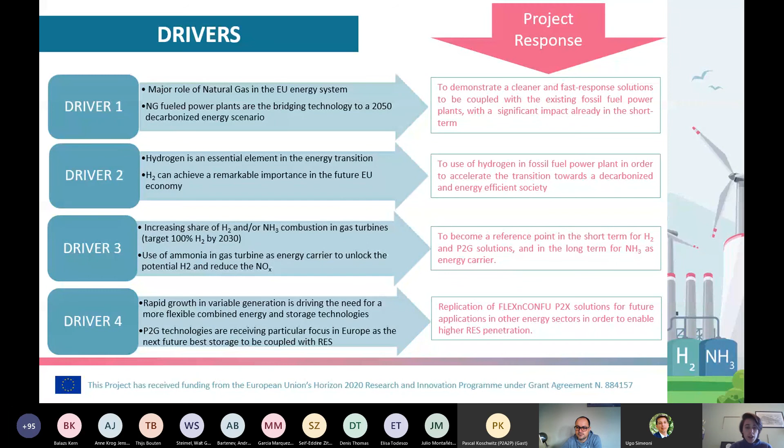Which is the goal, the aim of FLEXnCONFU? The aim is to demonstrate at TRL 7, which means that a prototype will be really integrated in a real operative plant, which is the power plant managed by EDP in Portugal, the Ribatejo power plant. So what we would like to demonstrate is an integration of a power to X to power solution that is able to increase, from one side, the fossil-based power plant flexibility, and at the same time reduce the emissions of the power plant itself.

And how would we like to do that? The aim is to demonstrate a power to X to power system based on non-conventional fuel. From one side, we will demonstrate a power to hydrogen solution, which is the one that we will develop and deploy in the real operative plant. But on the other side, we would also like to exploit the potential of ammonia, both as an energy carrier and as a combustion fuel.

To do that, a prototype of a power to ammonia to power solution will be tested in a laboratory at the University of Genova. In parallel to all these activities related to the power to X solution, there will also be some research on the combustion part. This is not the main aim of the project, which is more related to the power to X solution, but if we would like to integrate this system in a power plant and reduce emissions via the power to X system, we need to study and understand the combustion of hydrogen and/or ammonia.

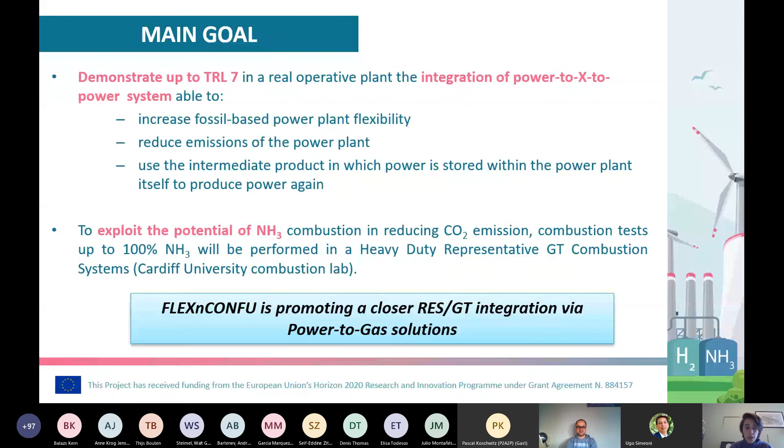Thanks to the Cardiff University Combustion Lab, some combustion tests will be performed, mainly related to ammonia, to understand all the problems related to the combustion. The aim, both at the Cardiff University Combustion Laboratory and in the power to ammonia system that will be developed and installed in Savona, is to reach 100% ammonia combustion.

The project is based on 4 main pillars. The first one is related to the use of non-conventional fuel to increase the flexibility and also the environmental sustainability of the power plant. In particular, hydrogen and ammonia will be studied as potential fuels to be used in power plants instead of natural gas, or in a blend with natural gas.

The second pillar is related to the integration and demonstration of such a power to X system in a real power plant. A 1 megawatt electrolyzer will be installed, integrated in a power to hydrogen solution in Portugal. The hydrogen will be stored and reused in the same power plant based on energy market needs and energy market constraints.

The third pillar is related to the development of proper grid-oriented control strategies. It's needed to develop a dynamic model of the system and define proper control strategies to control the electrolyzer, to store ammonia and/or hydrogen, and decide when to reuse such fuel in the gas turbine. Of course, all these controls are strictly correlated to the needs and constraints of the grid and of the energy market.

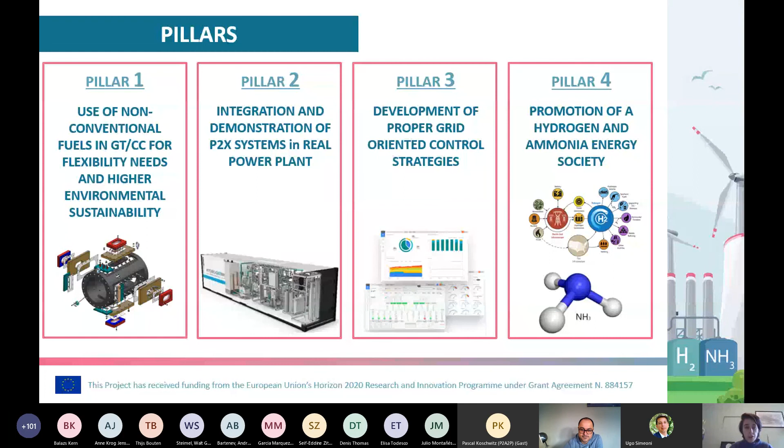First of all, some combustion studies will be performed by Cardiff University in their laboratory, in which both hydrogen and ammonia combustion will be studied.

Then we will have 2 demonstrations. The first one is at TRL 6, related to a power to ammonia solution that will be demonstrated in Savona, and in particular a power to ammonia system composed by an electrolyzer, an ammonia synthesis reactor, and ammonia storage will be integrated in an existing microgas turbine that will be properly modified to inject ammonia in the combustion chamber. So the combustion chamber will be redesigned for ammonia combustion.

And then we have the real demonstration in Ribatejo power plant in Portugal, in which a power to hydrogen solution composed by a 1 megawatt electrolyzer and a hydrogen storage, together with all the other components such as the hydrogen compression and the part related to injection in the combustion chamber, will be demonstrated and managed by EDP.

And then, of course, we don't want only to focus on the 2 demonstrations we have in the project, but also to demonstrate the potential replicability of our solution. So we already engaged 2 virtual demonstrations. One is managed by Tirreno Power, an energy utility with a power plant in Savona, Italy. And the second one is a power plant managed by ENGIE in Belgium, in which we would like to virtually demonstrate the FLEXnCONFU system toward the maximization of the replication potential.

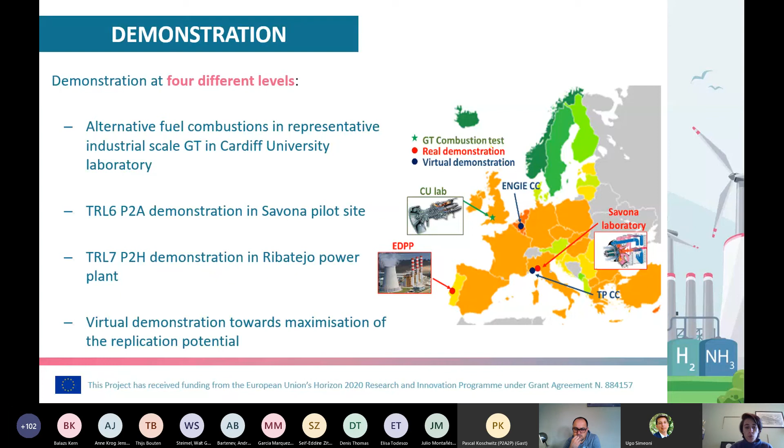So this is just a brief slide to demonstrate the time plan of our project. It started in April this year. We just finished the first 6 months of the project, and we started to discuss the layout of the single power to gas solution and how to integrate this system with an existing power plant. So we are in the assessment phase. Then, in 1 year and a half from now, we will start the development and pre-demonstration phase, in which all the components will be installed at the 2 demo sites, toward the demonstration phase.

And in particular, the 2 systems will be operative and monitored in the last year of the project, along with all the technical parts related to the development, deployment and installation of the power to gas system in our power plants. In parallel, we have all the activities related to environmental assessment, replication, and promotion and policy aspects, because we need to consider not only the technical constraints and needs, but also the regulatory framework and the policy and legislative constraints.

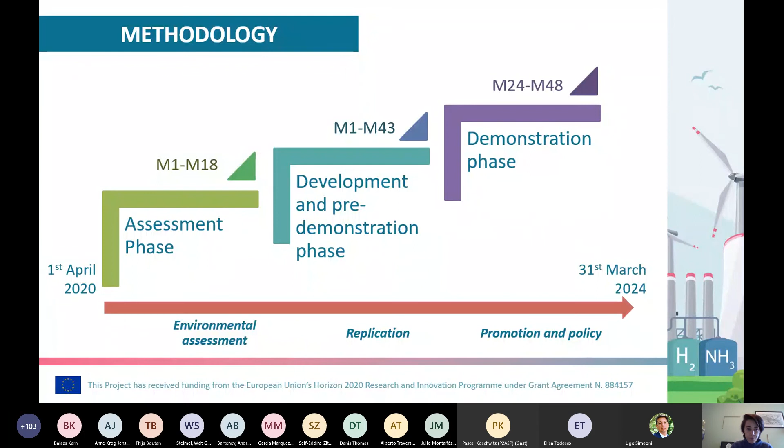The consortium is composed of 21 partners. It's really industrial driven, and we have partners that cover the whole value chain of FLEXnCONFU. So we have gas turbine OEMs, energy utilities, power plant operators, dissemination partners, and partners with capability related to ammonia combustion, the power to ammonia system, and the power to hydrogen solution.

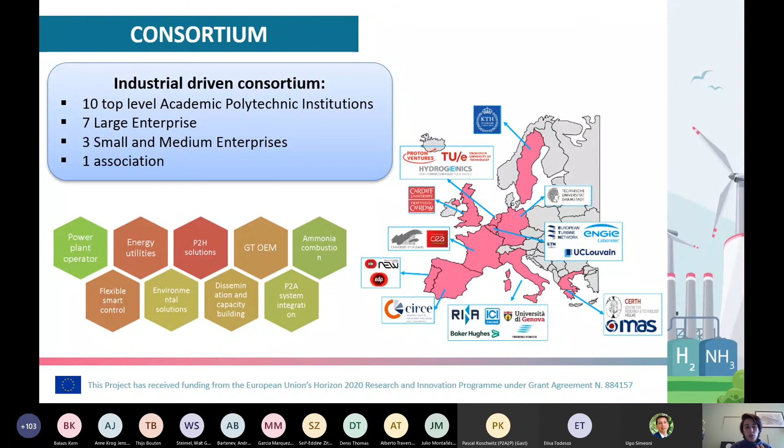Alessandra, can I ask you to finalize the presentation?

My last slide. So the impact of the project, as anticipated and as shown in my presentation, is related to contributing to a more secure and resilient power system through the integration of power to X solutions. The aim is to level and help existing power generation. To do that, we aim to have an impact on the power plant related to reducing the minimum load, increasing efficiency, reducing the number of startups, and having quicker ramp up and down, so as to make existing power plants more flexible. All these activities are related to helping the current energy system be more adequate and adapted to the dominant scenario in which intermittent renewable energy will have, and already has, a huge contribution to the current energy system.

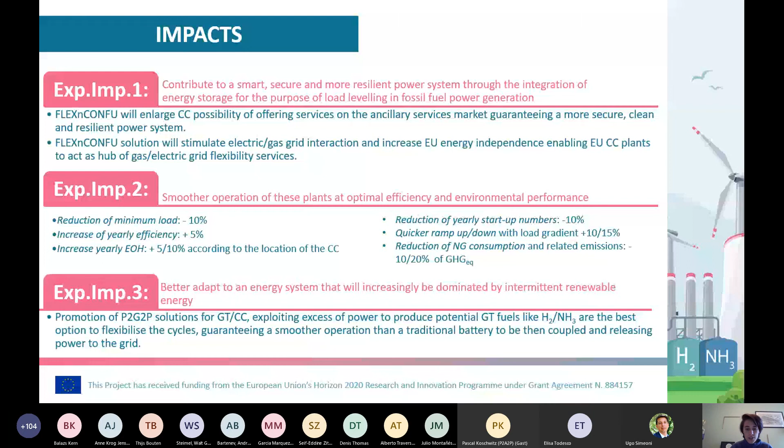I see in the chat we have one question that maybe we can take before we go to the next speaker: what will be the goal for the NOx levels?

Okay, so the goal—of course NOx is a problem when we talk about ammonia and hydrogen combustion. The problem of NOx will be deeply analyzed in the combustion laboratory at Cardiff University. For the moment, we do not have a specific goal. We would like to evaluate the NOx emissions and study possible NOx system solutions. We will follow during the project what happens and the discussion in Europe about this topic. So for the moment, there is no standard or constraint to be followed. Hydrogen combustion or ammonia combustion is something that is currently ongoing, and we follow the regulations, deeply analyze the emissions, and try to define proper systems to decrease them.

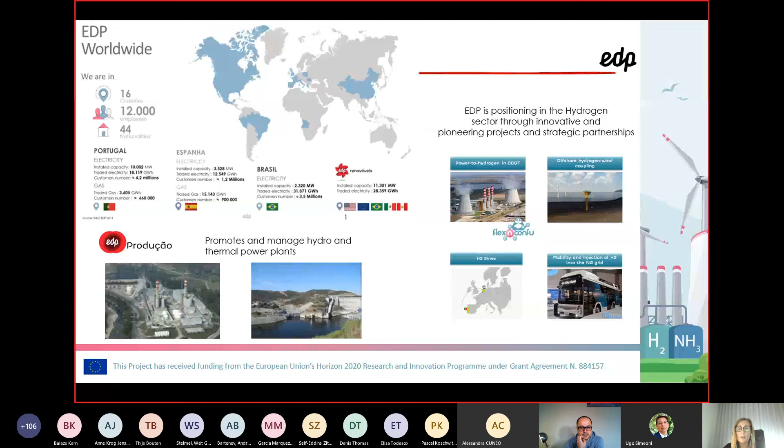Talking about our FLEXnCONFU project, the main goal is to test in a full-scale power plant the solution of power-to-hydrogen-to-power. Ribatejo is a combined cycle power plant located on the right side of the Tagus River, about 30 kilometers northeast of Lisbon. The power plant comprises 3 similar and independent units burning natural gas. The total installed capacity is 1,200 megawatts, and the unit has been in operation since 2004.

The FLEXnCONFU project consists of installing one fast cycle electrolyzer, PEM technology, producing about 250 normal cubic meters per hour of hydrogen. Then the hydrogen is compressed and stored at 200 bar, for further injection into the natural gas pipe that feeds the gas turbine.

The concept is to produce hydrogen when there is excess energy that's not dispatched, so the unit is in a ramp down, store the hydrogen, and burn it further to produce power again when demanded by the grid, so the unit is in ramp up mode. This can be valuable for grid balancing and/or ancillary services to the grid.

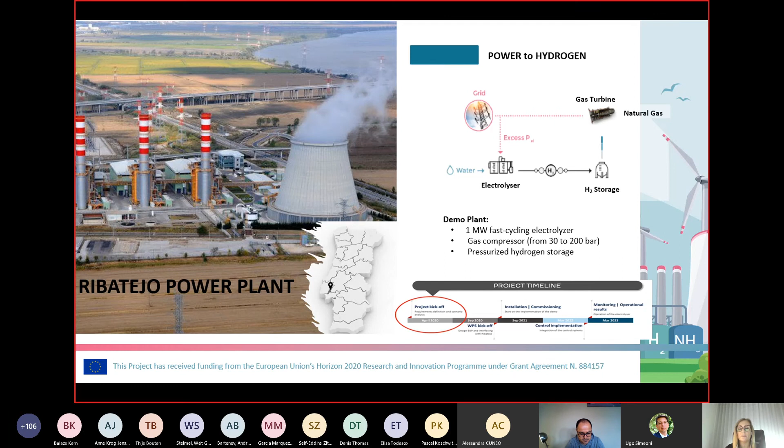To implement a project like this in the development phase, there are 4 main aspects to look at: the site, the technical aspects, the safety, and the regulatory. The site constraints and space availability is always challenging in retrofits, as we will see on the next slide.

Regarding technical aspects, the gas turbine assessment is critical. Using hydrogen in gas turbines, what percentage of hydrogen can we inject, and what modifications do these gas turbines need? We have already done a benchmark through the main original manufacturers, and all have said that below 5%, there is no need of big technical modifications. Only modifications regarding engineering, control system, and risk assessment are needed, but maybe a hydrogen analyzer may be required, which is quite expensive.

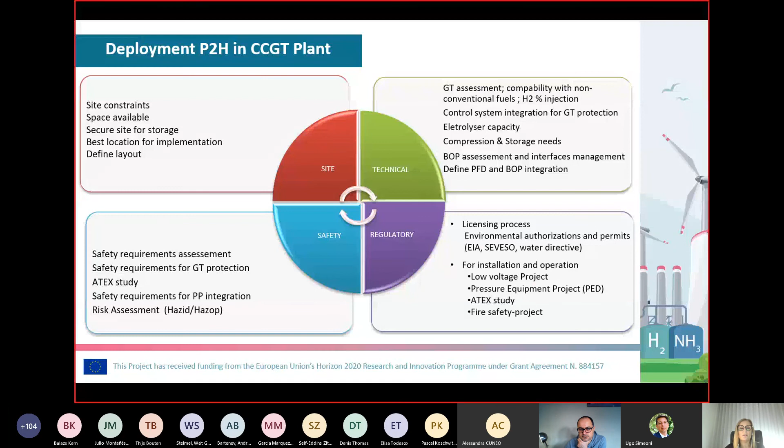Regarding the challenge of the layout, besides the gas turbine assessment and protection, the space required for installation could be challenging, especially in this kind of CCGT plants that are usually very compact, so there is not a lot of available space.

Here is the plant of Ribatejo. Choosing the best location means not only space availability, but also full compliance with safety requirements, namely respecting the distance from neighboring facilities, or including additional protection such as concrete walls, to respect the strict rules of NFPA and maintain the safety regulations.

And also the storage - what is the necessary capacity? We have already made an exercise for a minimum load. If we go to minimum load in a big plant, for the combined cycle power plant, in this case the minimum load in Ribatejo is 200 megawatts. Based on this, we studied different storage capacities, thinking of a storage capacity for 48 hours and for 8 hours.

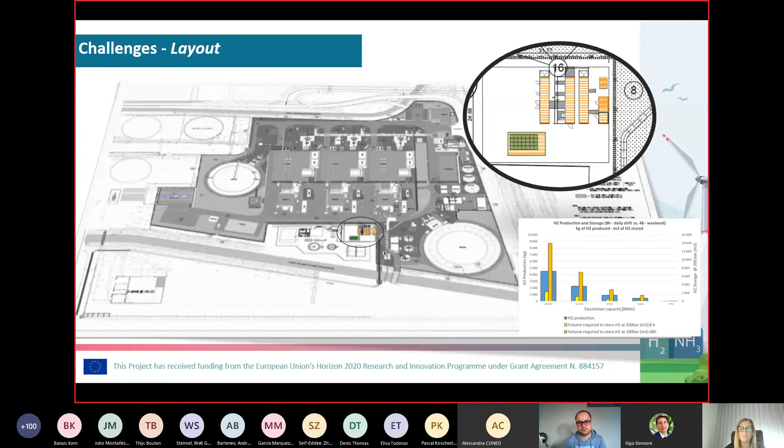Sorry, I'm leaving now. Thank you very much for listening to me, and I'm looking forward to hearing the contribution of other panelists. Thank you. Thanks a lot, Paula.

Sorry, we have a tight schedule. I would like to ask you one clarification question. Peter Jansen is asking why compression to 200 bar, much more than what the gas turbine will require, just to keep the tank size at a low level?

Exactly. For instance, for the power plant, we don't need because we inject - so we need to inject - the pressure in the pipe is almost 38 bars, so we need to inject at 40 bars, no more than that. But this is a question of space. So we should compress in order to decrease the space. Otherwise, we need a lot of space to store hydrogen at 30 or 40 bars. Okay, thanks a lot, Paula.

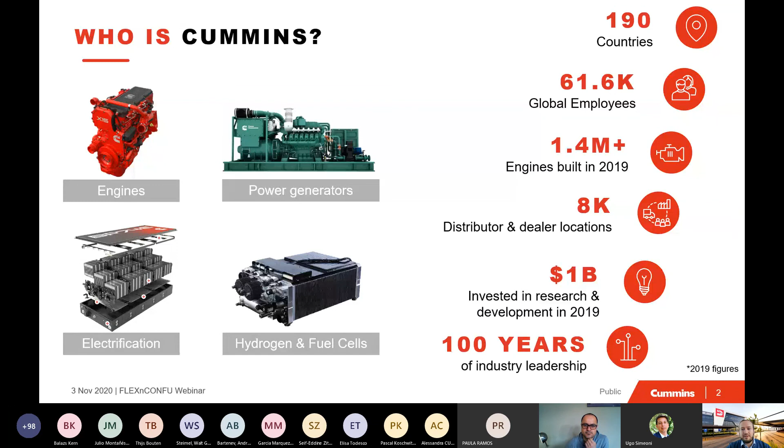Cummins has acquired Hydrogenics. Cummins is a US company, more than 100 years old, specialized in engines, mainly diesel engines for mobility and stationary power systems. Over the last 3 years, the company has diversified its activities and has acquired electrification technologies and also battery technologies. Last year, there were several acquisitions made in the field of hydrogen and fuel cell technologies.

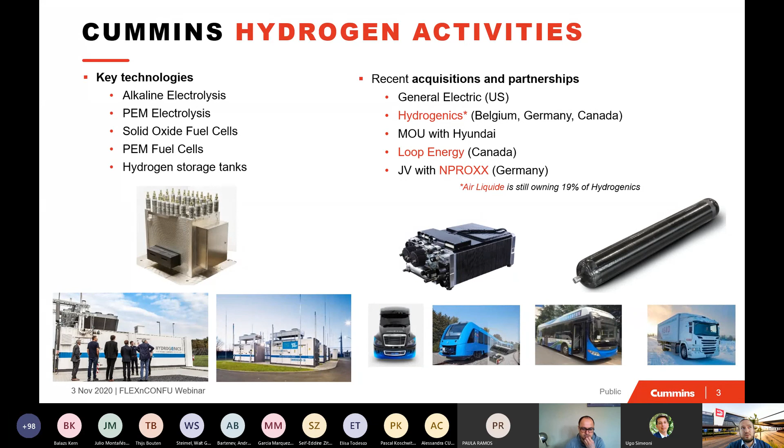Concerning the hydrogen technologies that we have in-house, we have both alkaline and PEM electrolysis technologies. Concerning fuel cells, we are active on solid oxide fuel cells and also PEM fuel cells. And also recently this year, we have formed a joint venture with NPROXX in Germany to also have the hydrogen storage tank technology in-house.

So we have decided to propose a PEM technology for the FLEXnCONFU project, which offers quite good flexibility and dynamic operation, but also it's much more compact than the alkaline technology. And as was presented just before by EDP, there was limited space available. So in fact, the product that is going to be deployed is based on what we call the HyLYZER 500 platform. I'll give some indications now.

So the role of the project, obviously, is to implement the electrolyzer at the Ribatejo power plant that will consume electricity from the excess of the power plant to produce hydrogen by using water. You see here a good rendering of the product that is going to be deployed. In the case of the 1 megawatt electrolyzer, there will be only one stack in the system, though the platform can have up to 2 stacks.

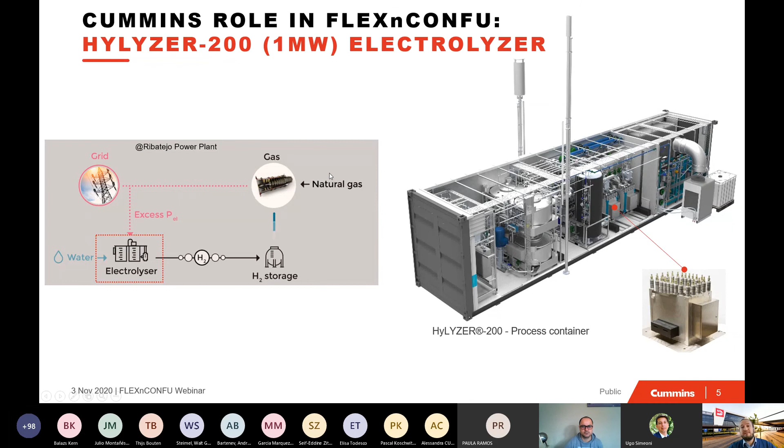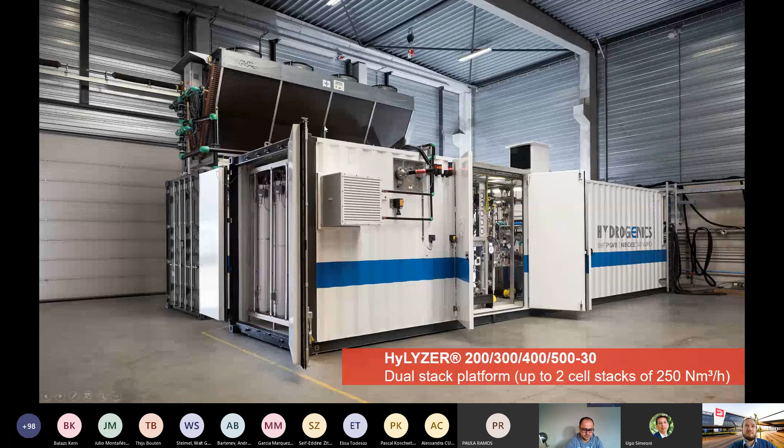This is a visualization of the product that is going to be deployed. This is actually taken from another European project called HyBalance, but it will be similar, though there will be certain improvements made inside the process area of the electrolyzer. Here you see the inside - again from the HyBalance project, but it will be very similar for FLEXnCONFU. And here you see the 2 PEM cell stacks that are going to be used, and some of the components inside the container.

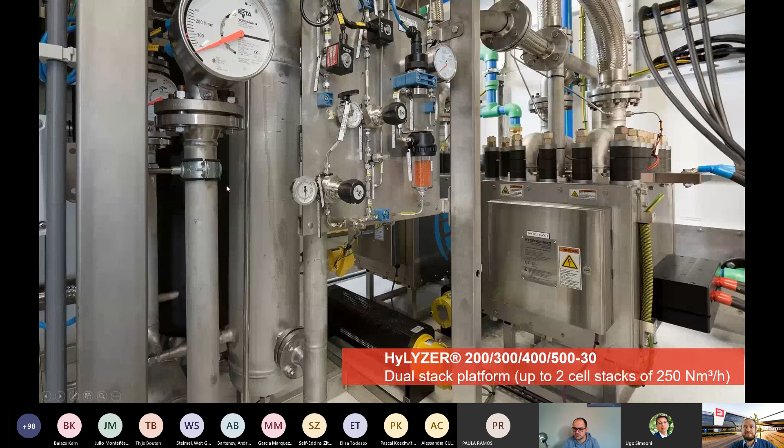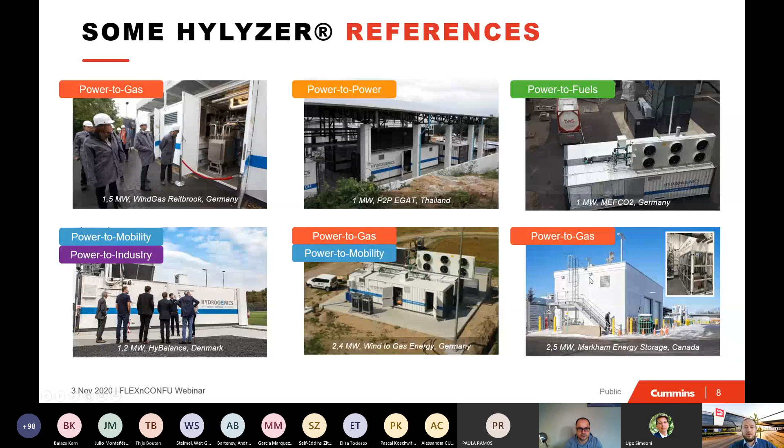Concerning the platform, it has already been deployed in several projects. The aim of FLEXnCONFU is not really to do a lot of improvements on the electrolyzer itself, but more on the concept of operating an electrolyzer in a power plant and then electrifying the hydrogen in the gas turbine. I'd like to show the flexibility aspect of the technology, with data coming from the Markham Energy Storage project in Canada, which is operated very dynamically. We receive a signal every 2 seconds, and the electrolyzer matches the power consumption with what is actually being asked by the TSO. We expect the electrolyzer to be operated in a similar way in the Ribatejo power plant.

Just to give some perspective on the electrolyzer technology, there is quite a lot of expectation on our industry today. Water electrolysis is really one of the key technologies, not only at the megawatt scale, but also at the scale of hundreds of megawatts or even gigawatts. So we are busy with an upscaling of the technology. The stack that is going to be used in FLEXnCONFU is a 1.25 megawatt cell stack, able to produce up to 250 normal cubic meters of hydrogen per hour, with an output pressure of 30 bar. That's one of the advantages of using PEM, you can save on the compression of hydrogen.

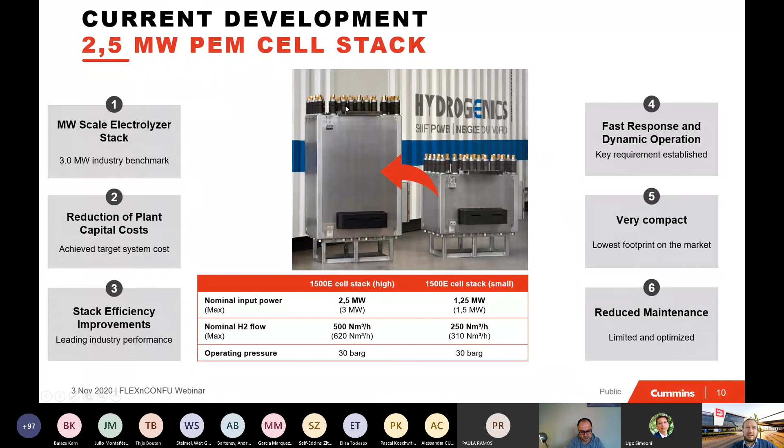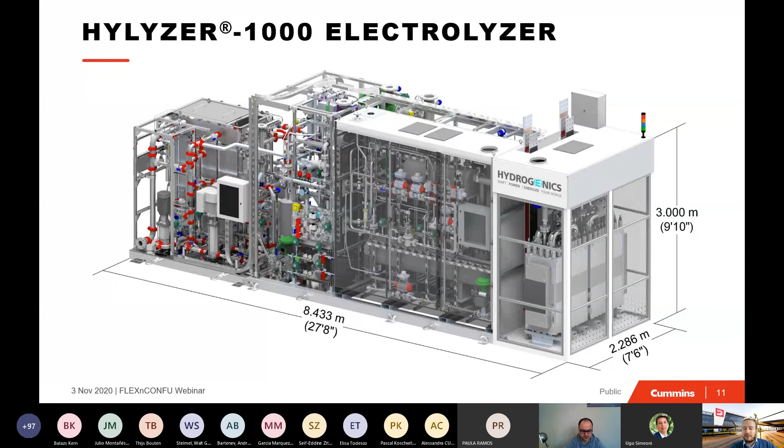What we are doing currently is an upscaling of the stack, doubling the number of cells to get a 2.5 megawatt cell stack. Today we are developing another platform called the HyLYZER-1000, which uses two of those larger 2.5 megawatt cell stacks. That platform has an input power of 5 megawatts and is able to produce 1,000 cubic meters of hydrogen per hour. We are already building that product in a project in Canada, which is in commissioning right now.

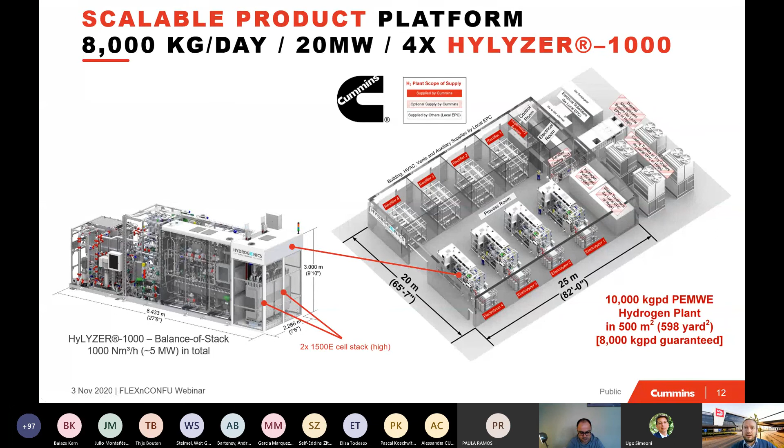That's a project together with Air Liquide, and it looks like this: we have 4 units of 5 megawatts each, next to each other, each connected to one rectifier, with all the balance of plant centralized. So if we think about an upscaling of the FLEXnCONFU project, it will be more in that direction that we would go. And that's it.

I think I stick to the timing, but I'm available if you have more questions. Thank you, thanks a lot Denis. Yes indeed, thanks for sticking with time. We have one question from Alberto Traverso.

Given the large size of electrolyzers, what's the use of oxygen? Is it just vented, or are there practical applications to exploit it? Good question. In most cases the oxygen is just vented, because there is no direct client next to it. But in some cases, like a project I have in mind in Argentina, the oxygen is purified, compressed, and used in hospitals. In some other industrial applications, where there is a use for oxygen and the oxygen pipe is not too far from the electrolyzer, a connection is possible. But in most cases, oxygen is rather cheap, so it's difficult to find a business case if the application isn't right next to the electrolyzer.

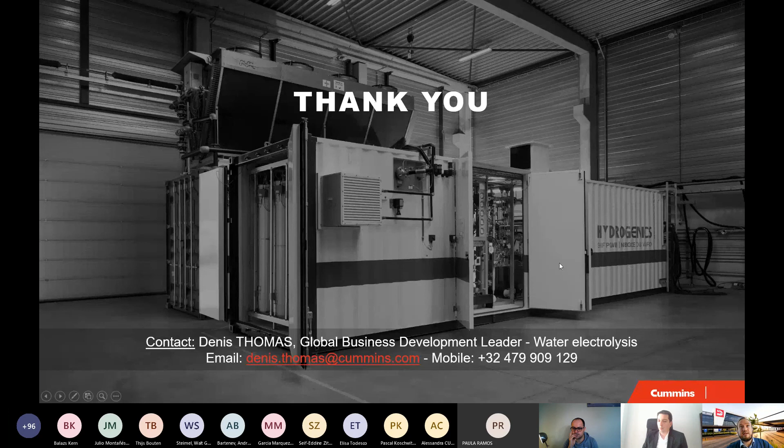Another question: what is the overall efficiency of the electrolyzer? In this case, we are in the range of - I think it was presented, let me show it back, maybe I was a bit quick on this table - we're in the range of 5.1 kilowatt hours per normal cubic meter of hydrogen produced by the unit. This includes all consumption of the utilities: water purification, cooling, and all the auxiliaries. We always prefer to express efficiency in energy consumption per normal cubic meter rather than in percentages.

Thank you. And the last question is from Michael Ladvik. Why 30 bars? Can it be 40 or 50 bar?

In principle, it could be higher, but then it would require a complete redesign of the unit. Obviously, it's always a challenge. When you increase the pressure, there are benefits for the downstream application, but it means you need to select materials that can handle that pressure inside your electrolyzer, so it makes the electrolyzer more costly. So that's a choice we made, to design a product up to 30 bar, and we see some alignment in the industry on that pressure level.

Okay, yes, I actually skipped one question. What is the driver to choose the size of the electrolyzer in the FLEXnCONFU projects? I believe this is the budget, but you can confirm, Denis. I mean, it was both available budget and also the available space in the power plant.

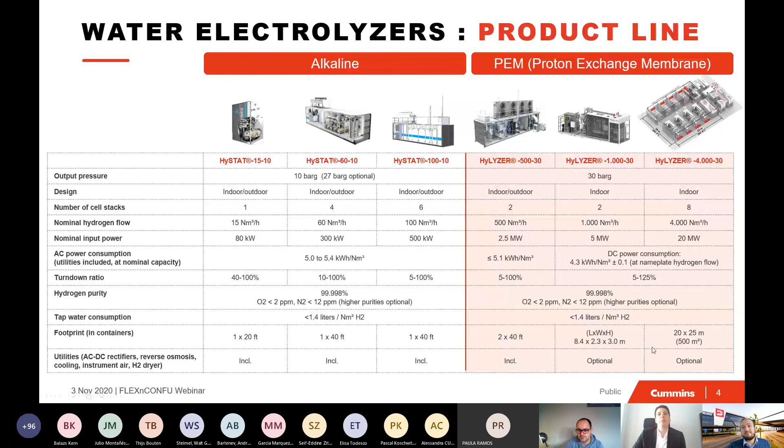Okay. Thanks a lot, Denis. I think we move to the fourth and last speaker, Pascal Koschwitz from the Technical University of Darmstadt. Their role in the project is the development of the ammonia reactor, so he will speak about these other power to ammonia solutions. Pascal, the floor is yours. Can you hear me?

Perfect. So I'll start and I'll try to make it quick, but so that you understand everything, not too quick. I would like to convince you why you should invest in ammonia and not in hydrogen or methane or other chemical storage systems.

Okay, let's get started. Why are we talking about ammonia? Because we need long-term energy storage. This is from the German Federal Environment Ministry, and they say that for 85% renewables, we're on the way to 100% renewables. For 85% renewables we need long-term storage, and for 100% we need roughly a quarter of what we consume in Germany here, at 2,500 terawatt hours, and we need a quarter of that in long-term energy storage.

And ammonia and hydrogen can be a long-term energy storage. These scenarios take into consideration that we have a European electricity network, so if there's surplus electricity in Germany, it can be transported to France, for example. But we still need a lot of energy storage.

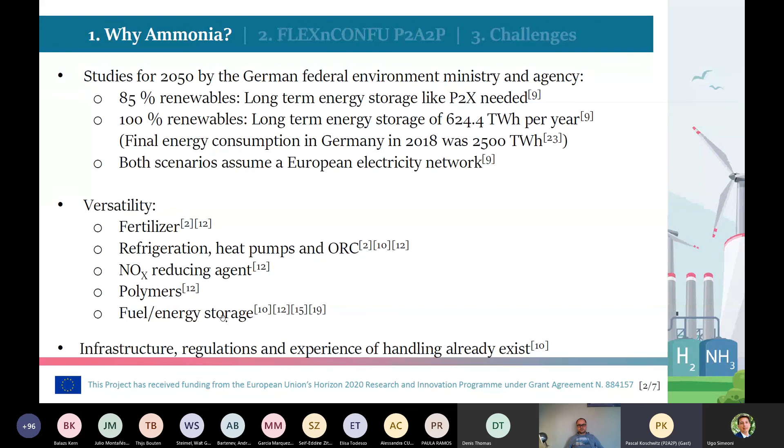So why ammonia? Well, ammonia has been used in the past as a fertilizer. It's one of the biggest chemicals produced. The infrastructure exists, pipelines exist, it has been handled, there are regulations, everything is already in place. Ammonia can be used as a refrigerant, is used as a NOx reducing agent, you can make polymers out of it, and most importantly, what I'm going to tell you in the next slide, it's an energy storage.

So here are the four possible renewable energy chemical storages: hydrogen, ammonia, and then some people talk about methane and methanol. Let's take a look at the parameters. At ambient temperature and a little more than ambient pressure, say 10 bars, hydrogen and methane are still in their gas state, and the energy density is very low. Whereas when you compress ammonia a little, you have a high energy density, comparable to liquid methanol.

But what you have with methane and methanol is that when you burn them, they produce carbon dioxide, and once it's out in the air, it's hard to get it back. Whereas ammonia and hydrogen have no emissions.

And these figures show that when you produce hydrogen, the cost of producing it is lower than that of producing ammonia. But when you store it for longer, the storage costs of hydrogen increase rapidly, whereas with ammonia it stays very low. So long-term energy storage will be ammonia, and short-term can be hydrogen.

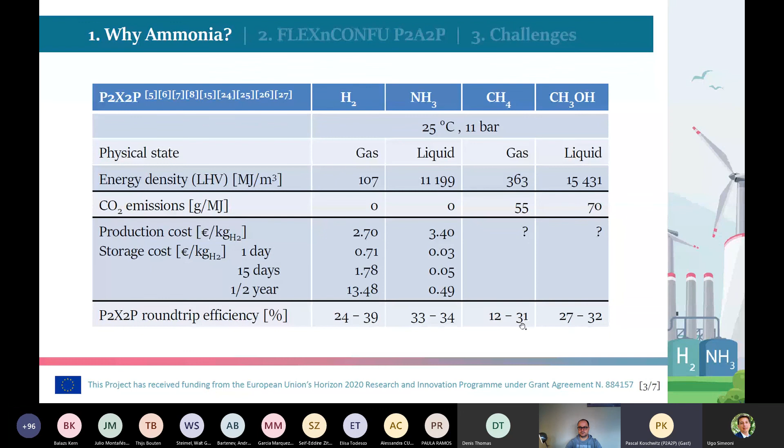We can do that. The problem is we need a good catalyst, the catalyst is key. At the moment, conventional iron catalysts don't work at these temperatures, so we need ruthenium or another catalyst. The problem is they're quite expensive, and for newer catalysts, the kinetics are largely unknown.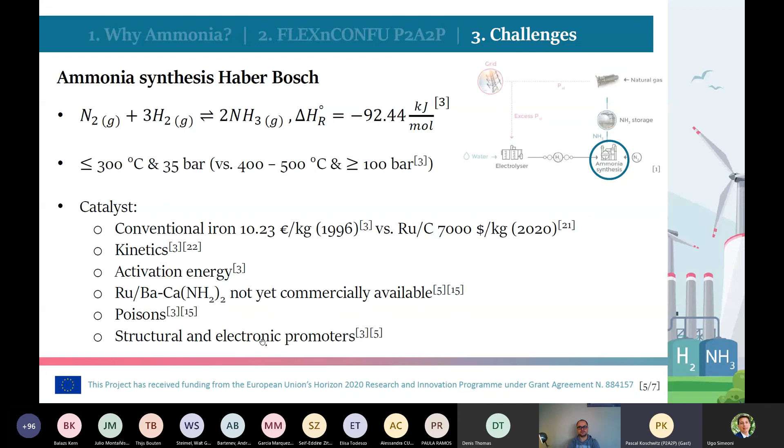So the ruthenium is based on carbon here, so what other metals, for example, here you have barium, calcium. It's largely unknown, but we're working on that.

Can somebody tell me how much time I've left? You have a couple of minutes more. Okay, so I'm well prepared because I didn't know how quick I would be.

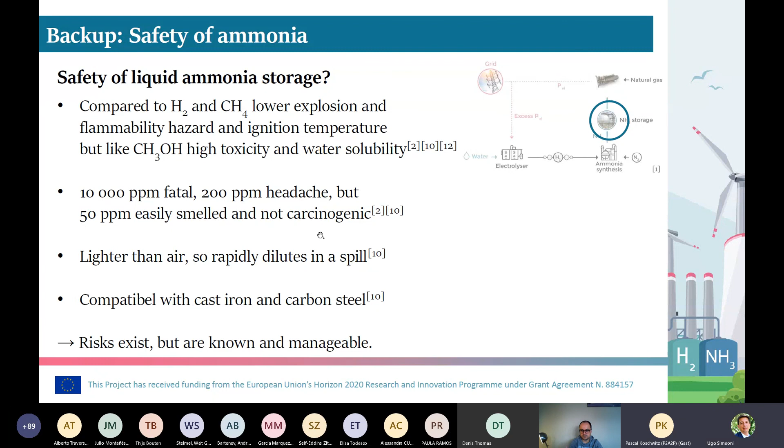What is the percentage of ammonia and NOx emissions you are aiming for in the demonstrator?

Next question: what are the objectives of the project in terms of TRL for the power to ammonia system? Will the 300 degrees Celsius, 35 bar system be achieved? We're aiming for 35 bars. It can be that we end up above that, but the pressure, for example, we don't know yet if that's really needed. If you go up with pressure, that's good for the reaction and good for the equilibrium, so I don't really know why we're aiming for low pressures. It can be that at low pressures the components are cheaper, but we don't know that yet. Currently we're looking for the components and the prices, and it may be that we don't have to go down that far. Does that answer your question?

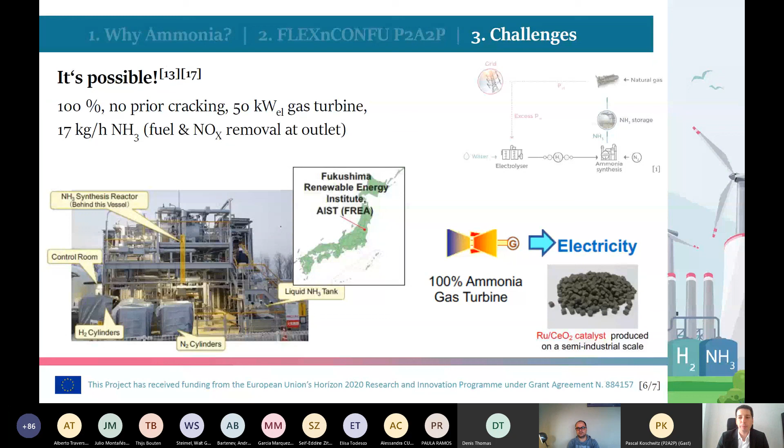Yes, and the next question is, what will be the model of micro gas turbine used for the tests? Don't know exactly the model, it's 100 kilowatts electricity. I can show you pictures later on, but I don't have them here, I don't have the data because it's not my focus, I focus on the synthesis unit. I guess it's the T100 from Ansaldo, but confirm. So the micro gas turbine is the one already installed in the Savona laboratory, which is the T100, originally from Turbec, now Ansaldo.

And we have a last question: is there a part on ammonia fuel cells in the FLEXnCONFU project? No, there isn't, but it's an alternative to using gas turbines. Yes.